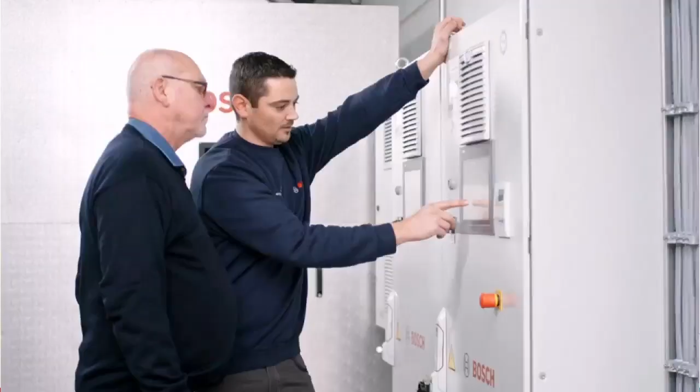Okay, so we are in the heavy industry. Our products, our boilers, are used for food, beverage, construction, all kinds of businesses. Paper, clothes, consuming an extensive amount of energy. At this moment, the energy is gas, oil, or a mixture of both. So where is the future going? And what is in it today for you?

We have a global increased demand for industrial steam or production heat. I'll show you something about that. We have an increasing global demand on industry itself, also goods, because the population is growing. That's a matter of fact. And we are pushing into CO2 neutral solutions with our products for our customers.

And global acting companies, as we call them the key accounts, Nestle, Mars, Unilever, Procter & Gamble, etc., are already going this way. They want to be CO2 neutral in 2030, sorry.

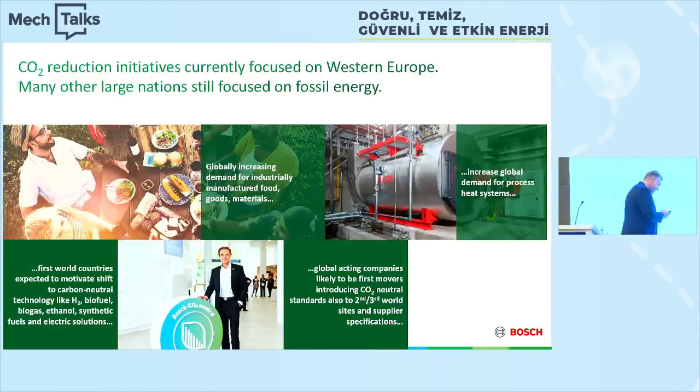So, starting with the facts that the population and the global energy consumption will increase in future. We have a sketch here showing the population of the world will increase consistently until 2050. Whereas the energy consumption will also increase because you need more food, more beverages, you have a higher standard of living. So energy consumption will increase. That's a fact.

And on this last slide, you see the energy consumption according to the fuels. And here you see an interesting fact. Fossil fuels, natural gas and oil, will grow a little bit, but we can see a downturn in this demand, replaced by CO2 neutral fuels.

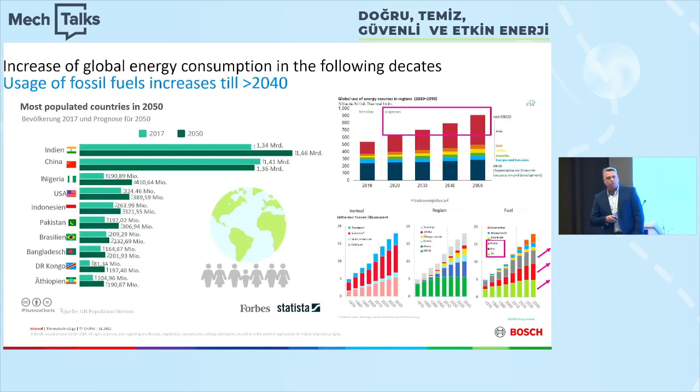So when starting a project to be CO2 neutral, I have basically two options. First of all, optimize my existing plant with energy efficient solutions. The higher the efficiency of my plant, the lower my fuel consumption. And we believe 20 to 30% of the energy used in the world nowadays can be saved by using the right technologies, which are available.

The future is the use of alternative fuels. Alternative fuels are available nowadays, but only in very small amounts. And it only makes sense if these fuels are produced green, with green energy, and then they call it carbon neutral.

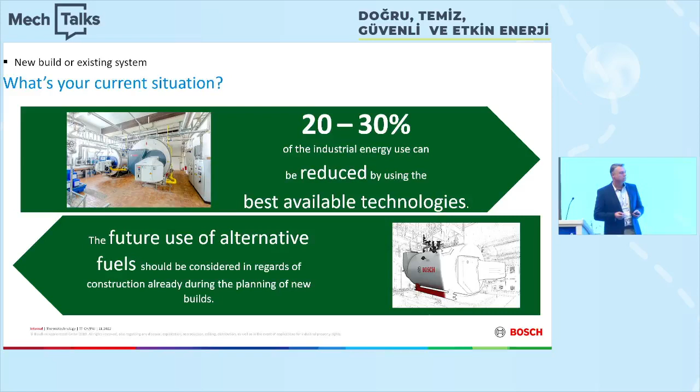What are alternative fuels? Or what is the main character an alternative fuel must have? First of all, it must be available. I don't need to plan a plant for H2 firing if I don't have H2 available. I come to this later. It must be ecological. That means it makes no sense to produce these fuels with a high amount of energy, like electric energy, or even hydrogen. But there are different hydrogen levels. I show you in the next slide.

It must be economical, of course. Otherwise it does not make sense. It will increase the price of all products, etc. A certain amount is accepted by the population or by the customer, but this always has limits. And last but not least, it must be storable.

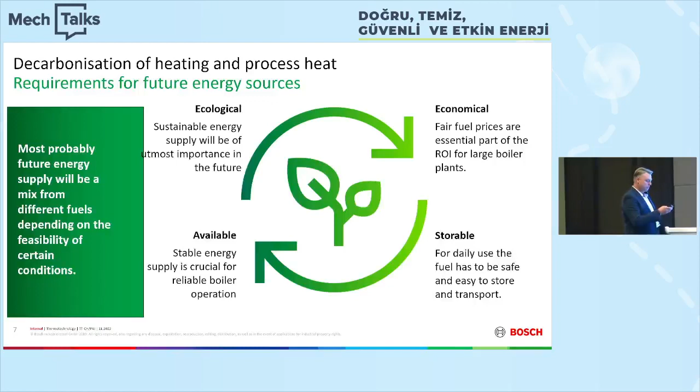So hydrogen. Hydrogen is now in everyone's mind as the fuel of the future. What is hydrogen? Hydrogen is the smallest atom in the world, and it has the ability to diffuse into metals. So this is a burden at the moment. Special materials are needed for hydrogen. The flame temperature to burn hydrogen is about 2000 degrees centigrade. And hydrogen has about 3 times less heating value than natural gas. So the consumption will be 3 times more to get the same amount of energy or heat.

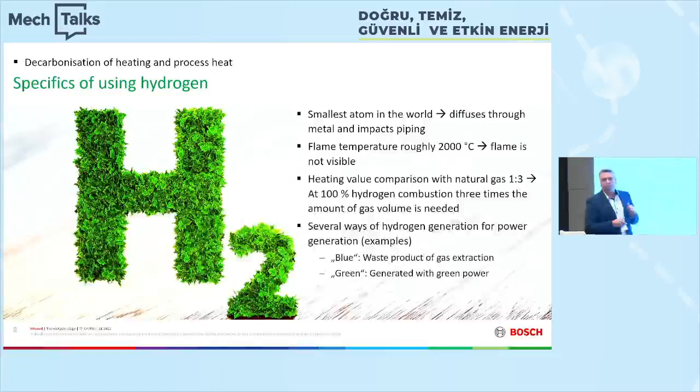There are several ways to produce hydrogen. One is called blue hydrogen and the other green hydrogen. What is the difference? Green hydrogen is CO2 neutral. That means it is produced using energy from wind or solar power, without using electric energy from the grid or power plants. This is real green hydrogen. Then we have something in between, called turquoise hydrogen. It's made by methane pyrolysis with energy from the grid, from the public network or from the power plants.

And gray, this is a bad hydrogen. It's made by electrolysis with electric energy from power plants. Could be coal, could be nuclear, whatever. Definitely, you need a lot of energy to produce hydrogen at this moment. And the question is, where does the energy to produce the hydrogen come from? Is this energy green or not?

The big benefit of hydrogen in any case is that it's storable. This is its biggest benefit, because storing electricity is quite difficult at the moment. You need big storage, a large amount of batteries, which are also not so environmental to produce.

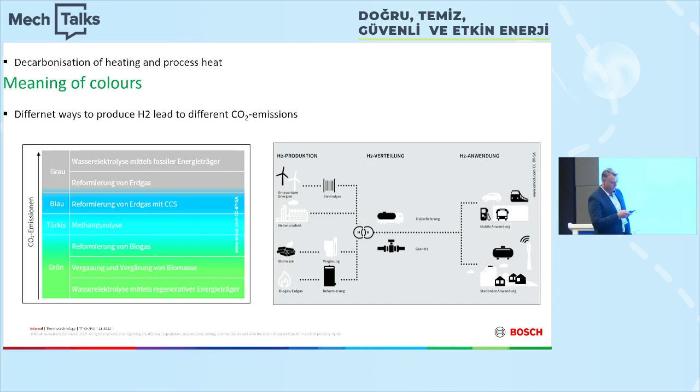So, overview. Motivation. What is the motivation to use H2 as fuel? Again, if it's available, it's a very quick solution to be CO2 neutral. With my existing boiler, the existing boilers can be transferred or transformed to burn or to handle H2. It's not a matter of the technology, it's just a matter of availability. Also a fast and quick solution which is available. It is transportable. This is also a benefit.

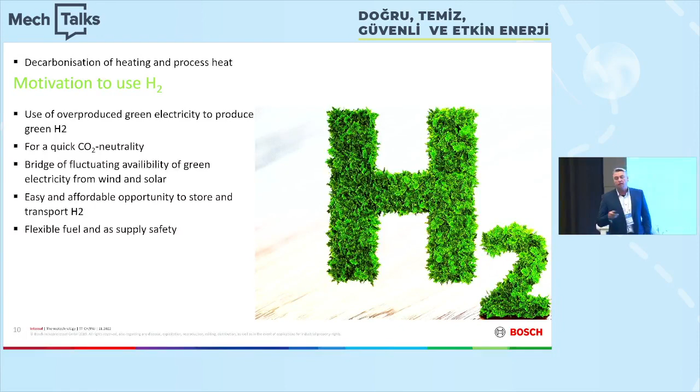Nowadays, the gas network is not capable for H2. Meaning in Europe or in Germany, in the German network for natural gas, there is already 10 to 15% H2 in this network, but that's the maximum at the moment. So the complete network must be built to be capable for H2. And this is not a short-term, this is a long-term solution.

Again, a slide about the drive or the benefit of green energy, green H2. It should come either from sun or from wind or from any other source which we don't know yet. Heat pumps, geothermic heat from the ground, from the soil.

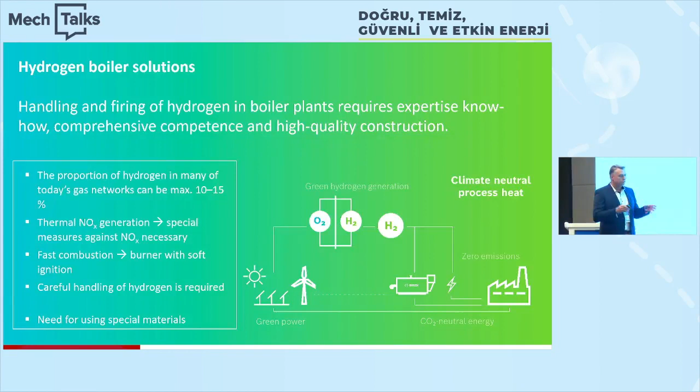So then water is divided in O2 and H2. We have H2 in gaseous form available. This can be burnt for the boiler, for the process heat, for heating. And it can be also transferred into electricity again. Now you ask, does it make sense first to put energy in, to produce H2, and then with fuel cells, you produce electricity again? This is only for storage reasons, transportable, localization reasons.

What alternatives do we have to the hydrogen solution? Well, what is available at the moment? We have a hydrogen product, finished product on the market, that can run 100% on hydrogen. This is a conventional boiler with a special firing system, also combustion system, made for hydrogen. Okay?

Hydrogen ready is if a customer nowadays is investing money and he knows in the future, I want to be on hydrogen. He can buy a hydrogen ready boiler. And when hydrogen is available in 20 years, which only changes the burner side, the combustion side, he runs on H2 and is CO2 neutral.

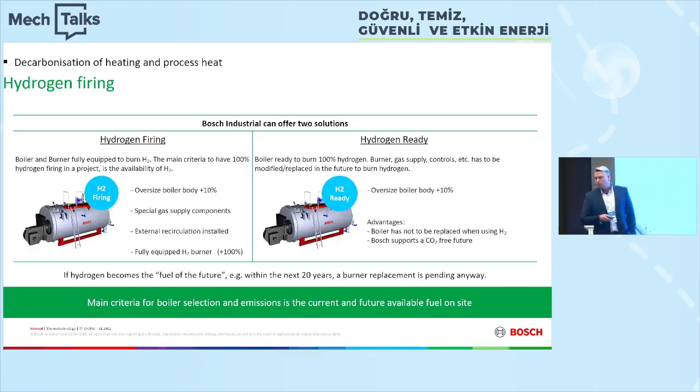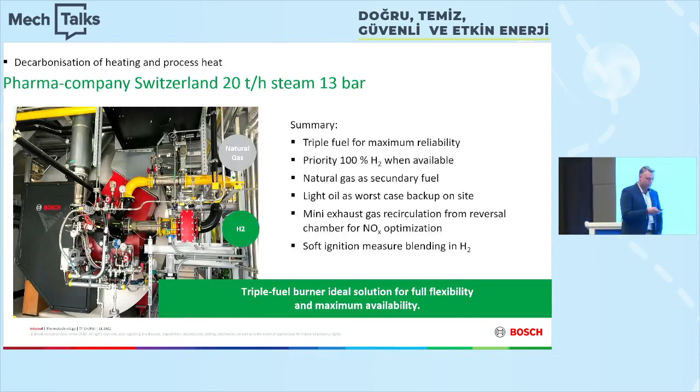This is an example of a company in Switzerland. It's a pharma concern, and they use 20-ton boilers running on 100% hydrogen already. They have the benefit that the hydrogen is produced in a plant next to them, and it's a side product of their process. So the benefit is also it's close, it's available, and it's kind of affordable. Plus, for production security, the boiler is also equipped still with a natural gas line.

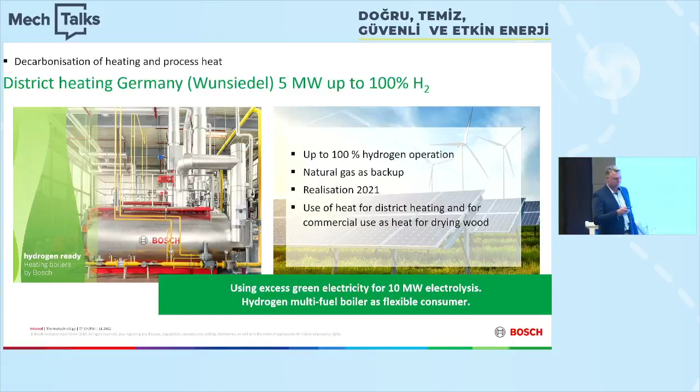This is a plant we have in Germany. This plant is a wood producing or processing plant. They do wood chips, they do decor woods, and they have their own energy supply or central. They use turbines. With the turbines, they produce electric energy. With the electric energy, they make H2. The H2 they use again for combustion, for firing. Also, you see they are available.

Now, my time is running out.

Now you ask the question, why produce H2, using a lot of electric energy to do that, why not put that directly into the boiler to produce steam or process heat with electric energy? And this is our latest, or let's say since 2 years, our most asked product. It is an electric steam boiler, directly electrically heated, up to a capacity of 7.5 tons with a connection load of 5.1 megawatt. Does this make sense?

Yes, it does, if the electricity comes from natural resources, from green energy, wind power, solar power. And that is a direct use of the electric energy produced into the process heat. So at the moment, this is the most feasible solution for a customer who wants to go CO2 neutral.

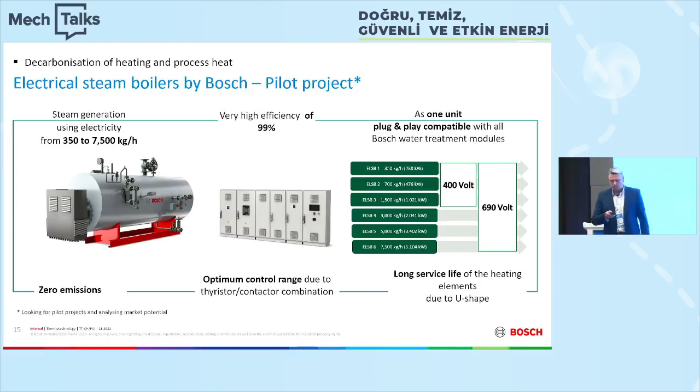Then we have a combination of both. This is a conventional boiler with a conventional burner and an electric heating element. That means the boiler can run on both fuels. Both fuels support each other. So think about, you have photovoltaic PV on the roofs during the daytime. My photovoltaic is supporting the boiler. It's free energy. It comes from the sun.

It's green. During the night, or if there's cloudy sky or rain, like it is at the moment, this burner can supply the boiler or the consumer at the customer with the necessary process heat. Also available, also possible with H2. And then we are again completely CO2 neutral.

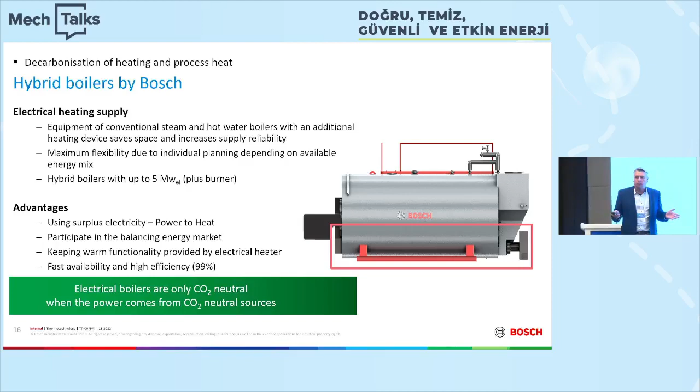Next topic is biofuels. Biofuels have been around for a long time. Wastewater treatment is a very good resource for biofuels. Biofuels can be fired completely without any additional engineering or any additional costs. Biofuels are in most cases available free of charge. And I take the example of big breweries, they have their wastewater treatment. Wastewater treatment produces biogas, and they use the biogas for their heating or for their process heat.

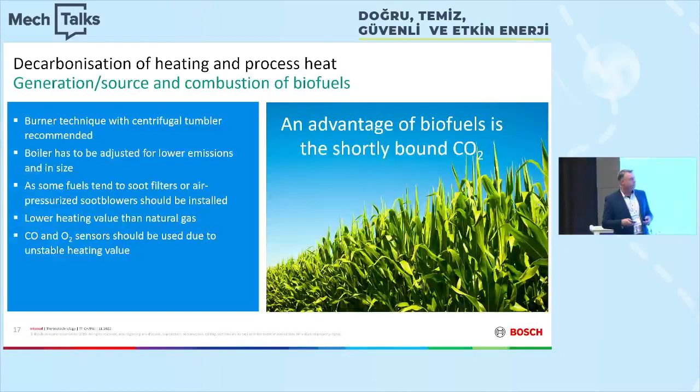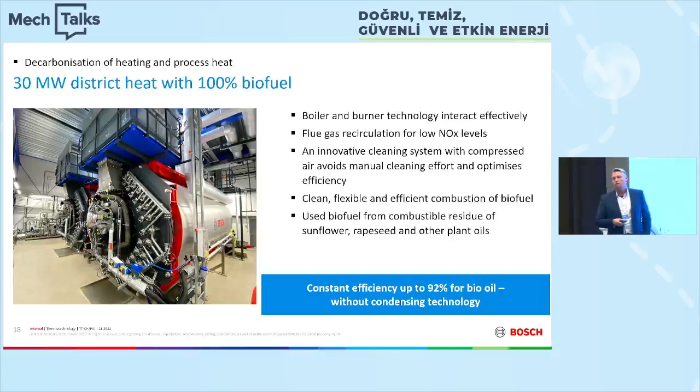This is an example of a biofuel boiler. Denmark is very, very into CO2 neutrality in general. And I would say in Europe, they are the first ones using CO2 neutral gas or fuels.